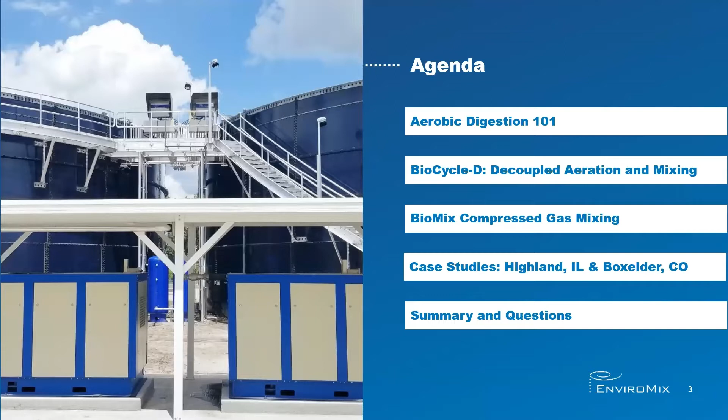So let's get started with conventional aerobic digestion. Did you know that aerobic digestion is typically the second highest, if not the highest, energy consumer in a wastewater treatment plant? During my nearly 20 years of experience in the wastewater industry, I've seen digesters with higher air demands than actual secondary treatment processes.

Which doesn't make any sense from an engineering standpoint. Yet, for years, the problem of aerobic digestion came down to the simple premise of blowing more air at the problem. Aerobic digestion can also have significant impacts on the main treatment process because of side stream return loads to the headworks of the plant.

But before we get to the Enviromix solution, let's start with a more basic question. What is aerobic digestion? The wastewater treatment process takes raw influent wastewater and uses chemistry, physics, and biology to clean the water before returning it to the natural environment.

In the secondary treatment process, microorganisms are used to consume and remove contaminants from the water. The solids treatment is what's done with those microorganisms once they've been removed from the treatment process. Aerobic digestion is a common treatment technology used at small to medium-sized plants for further treatment of waste-activated sludge from the secondary process.

The objectives of aerobic digestion are to prepare the sludge for subsequent use or disposal through the destruction of volatile suspended solids, or VSS, and the reduction of pathogens. In the aerobic digestion process, when no primary sludge is added, there is no food added to the sludge, so the oxygen requirement is for breakdown of the sludge only.

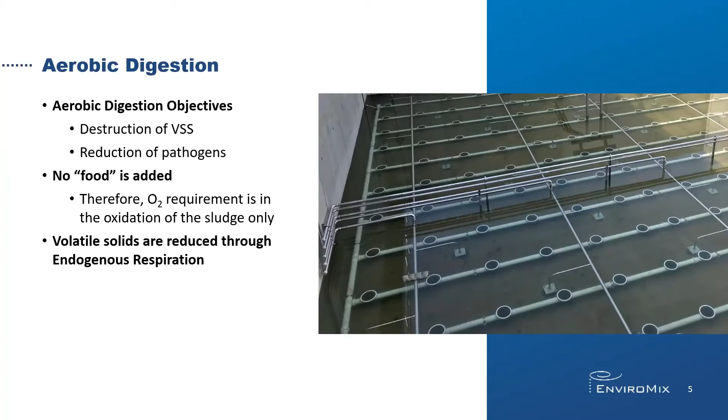Volatile solids are removed through a process called endogenous respiration, where some of the microorganisms die and are consumed by other microorganisms. Endogenous respiration is shown by these highly technical chemical equations.

I don't know about you all, but I don't remember seeing BOD sub bugs anywhere in my edition of Metcalf and Eddy. Regardless, as you can see, oxygen is added to the process and the microorganisms break down into less microorganisms, shown here as less BOD sub bugs, carbon dioxide, water, and ammonia.

As long as there is enough oxygen, the ammonia is then nitrified to nitrite and then nitrate. Notice that the nitrification process consumes alkalinity, which you'll see the importance of in a little bit.

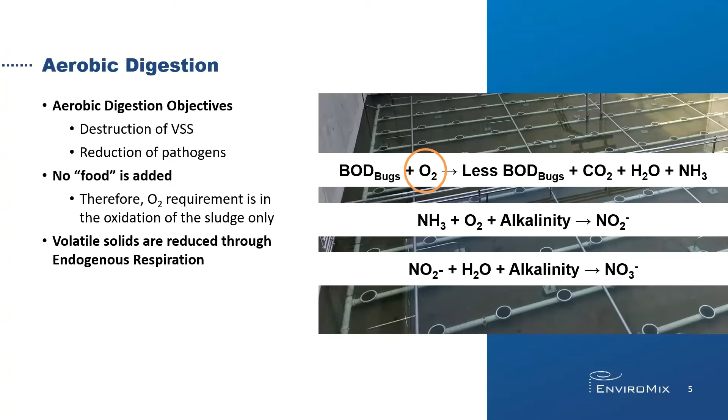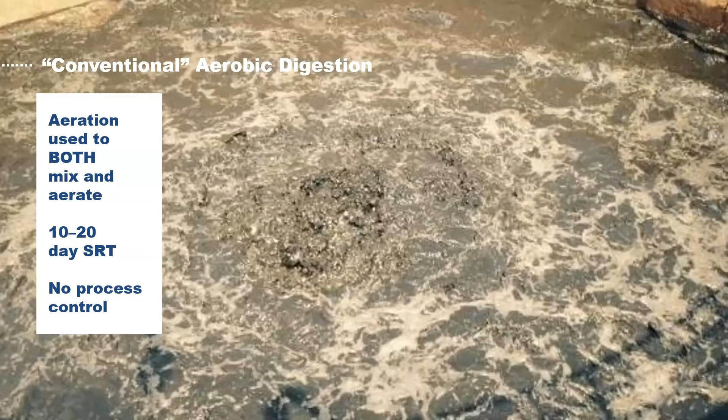In a conventional aerobic digester process, aeration is used to both mix and aerate the tank to provide oxygen needed for the endogenous respiration. The solids retention time, or SRT, is typically about 10 to 20 days. Operators usually manually run the process, and there is little to no automated process control.

For plants that are trying to reduce the financial burden of landfill disposal of biosolids, they need to treat their solids to meet regulations that allow for land application or other surface disposal. This is known as Class B solids. The relevant Class B regulation in the US is 40 CFR 503.

Aerobic digestion can be used to meet Class B solids under this regulation. As I mentioned before, there are two treatment objectives for aerobic digestion: to reduce pathogens and to destroy volatile suspended solids.

The Class B requirement for pathogen destruction is focused on retention time at specific temperatures: 60 days at 15 degrees Celsius, or 40 days at 20 degrees C, or equivalent pathogen reduction. The requirement for volatile solids destruction is at least 38%, or a specific oxygen uptake rate, also known as SOUR, of less than 1.5 milligrams of oxygen per liter. This VSS destruction is in place to reduce odors and prevent the attraction of rodents, flies, or other organisms, known as vector attraction.

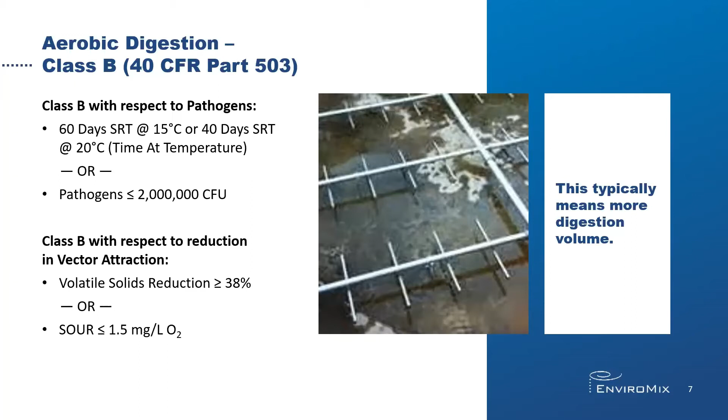Earlier, I mentioned that aerobic digestion is often the highest or second highest energy consumer at the plant. We talk with plants every day and hear about how they are being challenged to make every dollar go further. How can they continue to reduce their operating budget without compromising treatment needs?

Even though aerobic digestion is such a high energy consumer, usually it's put at the bottom of the list or forgotten entirely when looking for ways to meet these financial demands. The mindset of throwing air at the issue can be ingrained in our thinking because we don't think there's any other way to do it.

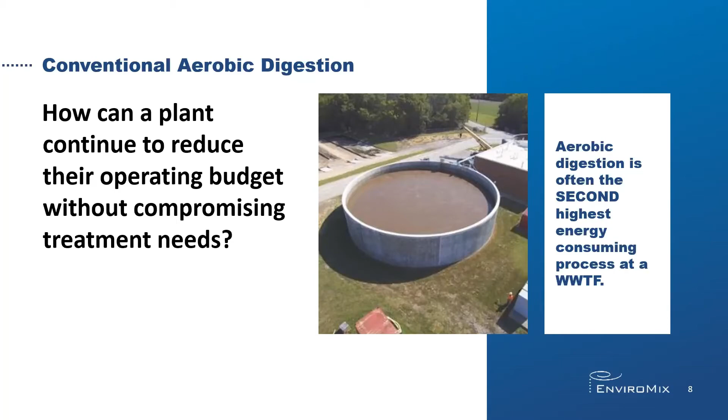So what's the problem with the conventional design? It starts with the aeration system and the difference between what is needed based on the process oxygen requirements and what is needed for mixing.

Sometimes the word mixing limited comes up when designing an aeration system. It isn't as common in aeration basins, although it certainly comes up there as well, but you see it all the time in aerobic digestion. So what does mixing limited mean?

Within a wastewater setting, aeration does two things: it delivers oxygen to the water and it mixes. Aeration is really good at delivering oxygen, and manufacturers have worked hard to maximize oxygen transfer efficiency. The mixing that aeration provides is a side effect of the primary objective of delivering oxygen. That means aeration hasn't been optimized to mix. As a result, once the oxygen demand is met, it can take significant additional energy to completely mix the tank.

In the design of an aeration system for an aerobic digester, two factors are considered when determining the air requirements. The first is the amount of air required to keep the contents of the tank completely mixed. The rule of thumb is between 30 and 40 SCFM per 1,000 cubic feet of tank volume.

The second is the amount of oxygen required for the process, also known as the biological air requirements. Typically, that is around 2.3 pounds of oxygen per pound of volatile suspended solids destroyed. The aeration system needs to be designed for the higher of these two air requirements, which depends on a couple of different factors.

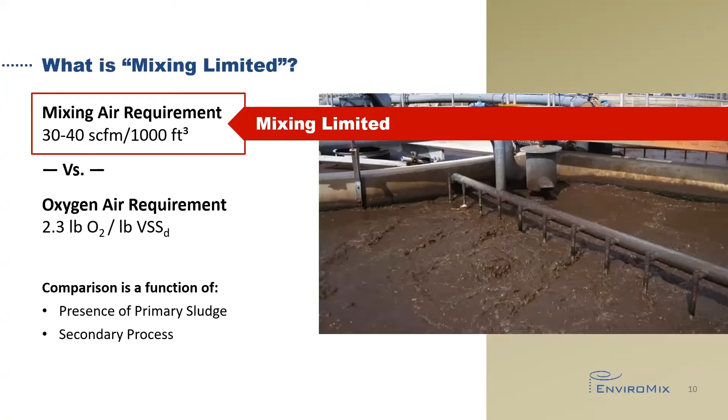That's when we say the process is mixing limited. So what's the problem with the conventional approach to aerobic digestion? Remember, aeration hasn't been optimized for mixing efficiency. The primary concern with the previous approach is the operating budget, and all that excess air being sent to the tanks to ensure adequate mixing really ends up being wasted energy.

Let's say in our previous example that the air required for mixing is 1500 SCFM, and the air required for the process is 1000 SCFM. If the system constantly has to operate at the air requirement for mixing, it's operating at 500 SCFM higher than what's actually needed for the biological process. Essentially, you're using 50% more energy than you need to accomplish the treatment objectives.

Additionally, when we look at the chemical equation for endogenous respiration, remember BOD sub bugs? We saw that ammonia was produced as a byproduct. When that ammonia is nitrified, alkalinity is consumed. Without supplemental addition of alkalinity, the plant can expect a drop in pH. This low pH and excessive aeration can also result in poor sludge dewatering characteristics, which requires higher polymer consumption.

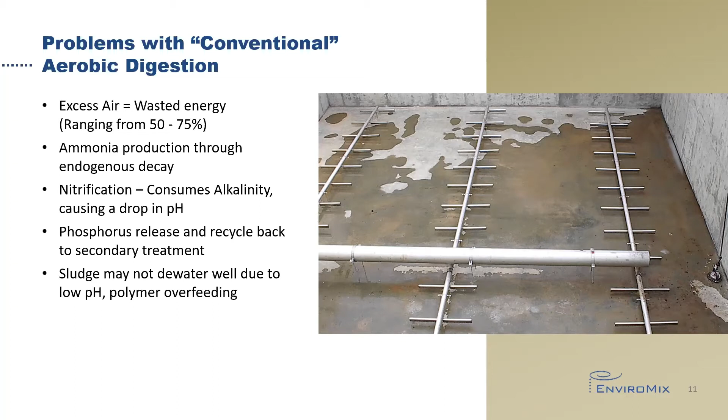Unfortunately, we see many plants that have aerobic digesters that are mixing limited. Why? Well, the number one reason I see is a plant that is operating at a lower capacity than what it was designed for, resulting in lower loading, not only in the secondary process, but in the digesters as well.

Another reason digesters specifically are mixing limited is due to the longer sludge ages in the secondary process. These longer sludge ages help with liquid treatment and lowering effluent nutrients, but result in lower oxygen demands on the solid side, because some of the digestion work gets done in the secondary process.

The other reason that so many plants are mixing limited is the use of higher efficiency diffused aeration over alternative coarse bubble, jet, or other aeration devices. These higher oxygen transfer efficiency diffusers are great, but remember how the aeration system gets designed: it's the maximum of either the air needed for oxygen delivery or the air needed for mixing. And that mixing air rate makes no distinction between aeration device. As a result, all of the energy saved by that great oxygen transfer efficiency is lost because you still need to hit that requirement for mixing.

Finally, we also see aerobic digesters that were converted from different tanks already on site, like an old primary clarifier rededicated to an aerobic digester. Those primary clarifiers can be much larger than what the system design requirements would dictate would be needed, and those systems are routinely mixing limited as well.

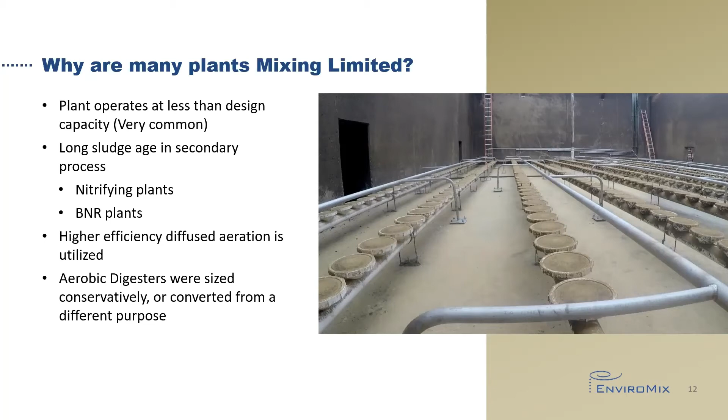Next, I'd like to discuss Enviromix's optimized aerobic digester design approach, which includes mixing that is independent from the aeration equipment.

BioCycle D works by alternating between aerobic and anoxic conditions to provide an ideal environment for sludge digestion. The process also offers two alternative modes of operation, selected based on a plant's individual setup. For plants that utilize a belt press or centrifuge for dewatering, there is a sludge processing mode of operation. For plants utilizing gravity thickening with an automated decanter, the supernatant return mode allows for this type of operation. We will go into each of these in greater detail.

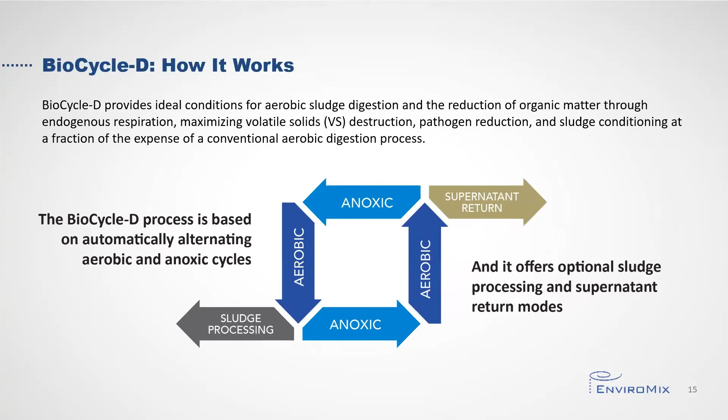During the aerobic cycle, air is provided to the system to facilitate VS destruction. For plants with conical or sloped bottom tanks, or when the air demand is lower than that of the mixing demand, the mixing system will operate at the same time as the aeration system. That ensures the tank remains mixed and that the aeration is able to deliver just the right amount of air without over-aerating the process. During the anoxic cycle, the BioMix compressed gas mixing system ensures complete mixing to create anoxic conditions for denitrification, alkalinity recovery, and pH stability.

Cycling between the aerobic and anoxic conditions causes cell walls to rupture, which allows for increased VS destruction and improved sludge dewaterability. That reduces polymer demand and operating costs.

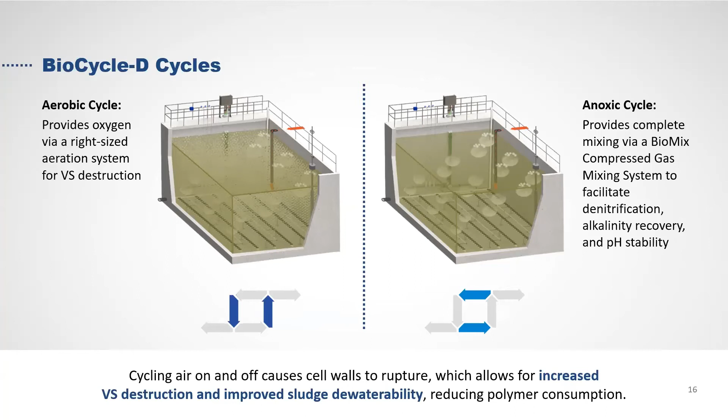As I mentioned earlier, there are two optional modes of operation designed to sequester the nutrients in the sludge and eliminate nutrient spikes in the return streams to the secondary process. The sludge processing mode is utilized when sludge is being removed from the tank for further processing.

When we were developing BioCycle D, we heard from dewatering equipment vendors who told us that the most important thing for their equipment is consistent flow and consistent solids concentration. Sludge processing mode does just that. This mode uses the mixing equipment to ensure the sludge is homogeneous, which helps regulate and stabilize the polymer addition.

During this mode of operation, the ORP readings in the tank are monitored to ensure the process doesn't go anaerobic and allow for P release. If ORP drops below a set point, the aeration is turned on to provide oxygen to the process.

Supernatant return mode is used specifically for plants that have an automated decanting device, whether that be with a floating decanter or an automated telescoping valve. Gravity thickening can help increase capacity by thickening the sludge and removing excess water.

The supernatant return mode can automatically initiate a decant after a user selectable settling time. The decant cycle ends depending on one of three factors: time of decant, liquid level, or weir position. After decant is complete, the system resumes an aerobic cycle. By sequestering the nutrients in the sludge and reducing the loading to the main treatment process during supernatant return, BioCycle D reduces operating costs for the main treatment process while optimizing sludge digestion.

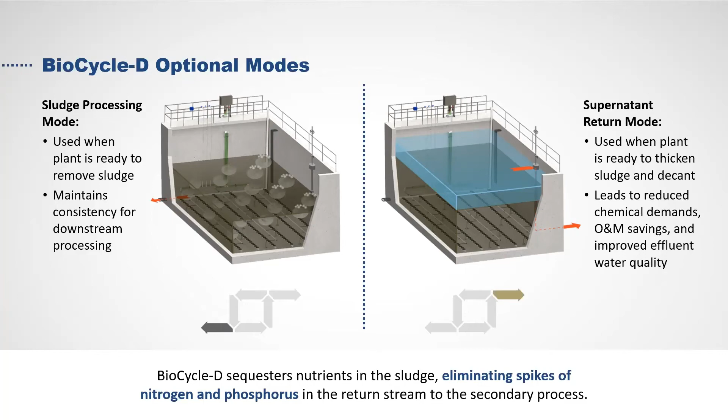The key to BioCycle D and its ability to optimize aerobic sludge digestion is the decoupling of aeration from mixing. The diffused aeration system is right-sized to satisfy only the process oxygen demand. The basin contents are uniformly mixed by the compressed gas mixing system, independent of the aeration system operation.

This opens up a bunch of possibilities that weren't possible with traditional aerobic digestion operation. On the energy side, it eliminates the need to sustain the traditional 30 to 40 SCFM per 1,000 cubic feet design guideline. On the process side, by maintaining the optimal DO needed for the digestion process, BioCycle D is able to recover alkalinity and control pH, reduce plant power bills through oxygen recovery, and reduce nutrient recycle back to the secondary treatment process. The denitrification process can also reduce the proliferation of filamentous bacteria, thereby improving settling, sludge thickening, and overall operational efficiency.

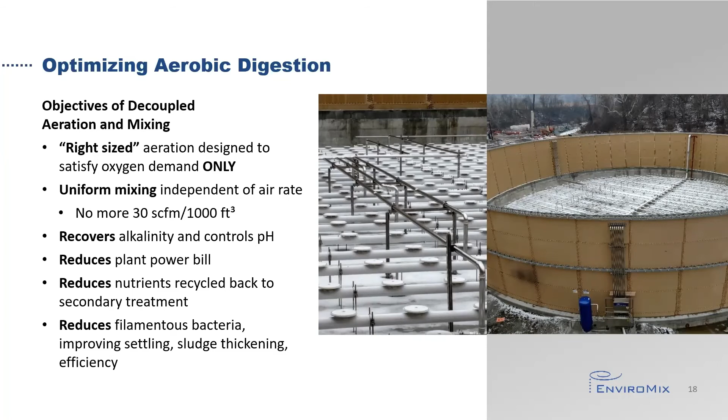By regulating the aerobic phase of the process through DO instrumentation feedback, optimized air delivery and effective digestion are achieved. During the aerobic phase, the blowers operate to achieve the DO set point. We typically recommend that the blowers be on VFDs, which allows for the requested DO concentration to be precisely maintained. However, we can also work with existing infrastructure where there may be blowers without VFDs.

That is what we are showing with this data. The blowers at this plant are start-stop controlled.

Controlling the anoxic phase of the process through ORP monitoring and efficient mixing via the BioMix compressed gas mixing system enables denitrification and alkalinity recovery while reducing nutrient return in the digester supernatant. During the anoxic phase, the blowers shut off and only the mixing system operates to achieve the low ORP set point for denitrification. Once the low ORP set point is met, the aerobic phase begins again and the cycle repeats.

The aerobic and anoxic phase cycling minimizes nutrients in the supernatant return, and the process benefits of optimized digestion result in improved sludge dewaterability.

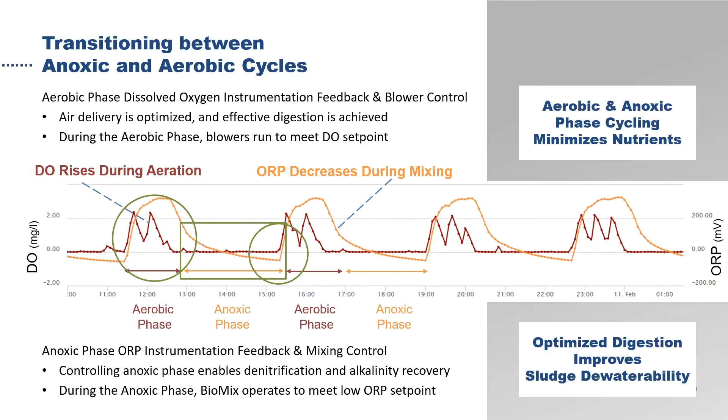BioCycle D operates with repeating aerobic and anoxic cycles. Aerobic cycles are facilitated by the right-sized fine or coarse bubble diffused aeration, and the anoxic mix cycles are facilitated by the compressed gas mixing system.

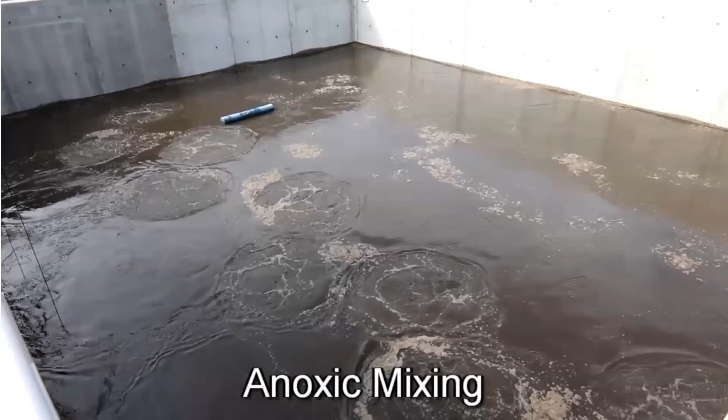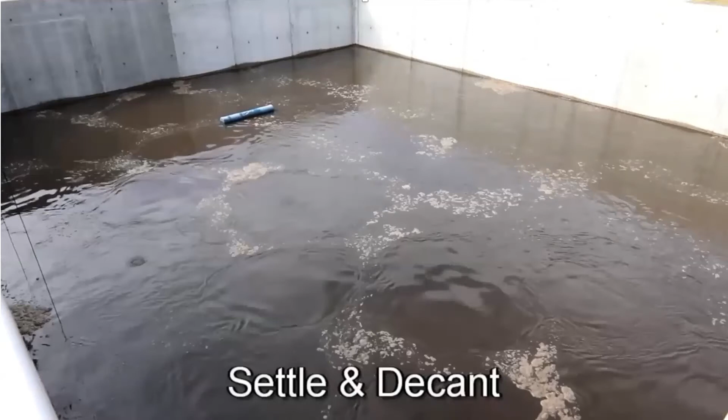The anoxic cycle is followed by an operator selectable settling and decant phase of the operation to thicken the sludge and return supernatant if desired.

Decoupling aeration from mixing allows for independent and optimized control of oxygen transfer and mixing, whereby fine or coarse bubble diffused aeration is provided for oxygen transfer, and the BioMix compressed gas mixing system provides efficient mixing. The aeration system is right-sized, and therefore the aeration system operates only for the process oxygen demand, not for mixing.

The compressed gas mixing system may operate during the aerobic periods when the air rate is lower than that needed to sufficiently mix the basins. And of course, the compressed gas mixing system will operate during the anoxic phases.

BioCycle D is typically designed with 12 to 16 hours of aerobic time per day and 8 to 12 hours of anoxic time per day. It is typical that the BioCycle D aerobic digestion process will operate with less aerobic time and more anoxic time at startup, when the plant is typically at less than design loading, thereby providing further energy savings.

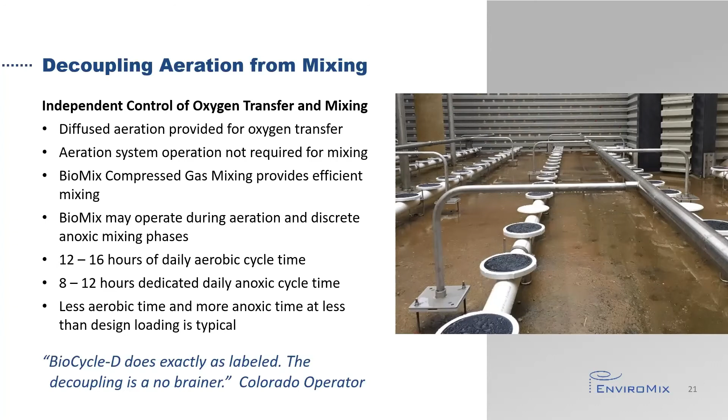One feature of the BioCycle D system that plays a large role in providing optimized aerobic digestion and unparalleled flexibility is the compressed gas mixing system we call BioMix.

The BioMix compressed gas mixing system utilizes a rotary screw compressor to supply compressed air based on the system's demand for mixing. The compressor discharges to the receiver tank, which buffers air demand and maintains system pressure.

From there, the air goes to the local valve control modules that control the parameters of frequency of firing for each header in the basin, the duration of air release, and the sequence of nozzle header firing. Finally, the air is released from the in-tank stainless steel maintenance-free nozzles.

Enviromix provides all the major mechanical components for the system, complete with unit responsibility, and guarantees mixing effectiveness backed up by a field performance test.

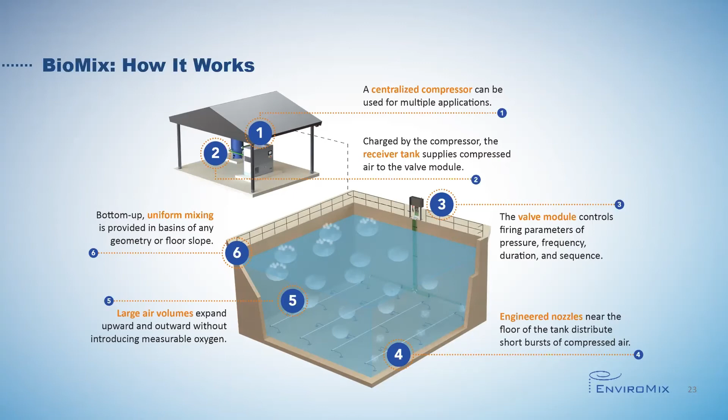BioMix operates by introducing short duration, half to one second bursts of compressed air fired through the nozzle header system. This creates a distributed bottom-up rolling mixing action. Groups of nozzles arrayed on an individual nozzle header are fired 2 to 3 times per minute to ensure uniformly mixed basin contents.

You can see in the video here the changing of the cycles between aerobic, anoxic, and settle and decant.

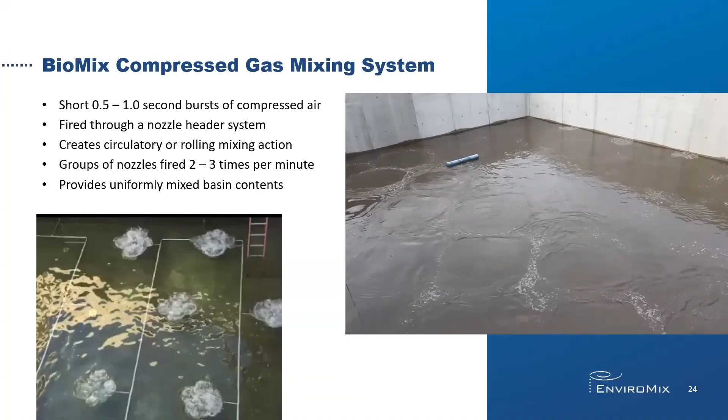With traditional mixing technology, maintenance is the key challenge. The main issues being hair and ragging of impellers, mechanical seal failure, gearbox maintenance, in-basin oil changes, and general longevity and reliability. Energy consumption is typically about double in comparison to BioMix in an aerobic digestion application.

Furthermore, redundancy can be a concern with traditional mixers. When a mixer is out of service, the process efficiency will suffer. Whereas with BioMix, a duty standby arrangement can provide 100% redundancy.

Finally, mechanical mixing technology is operationally inflexible because it doesn't allow aeration and mixing to be operated at the same time. However, because BioMix can pick up the mixing requirement, the aeration can be adjusted to match only what is needed to meet the process oxygen demand.

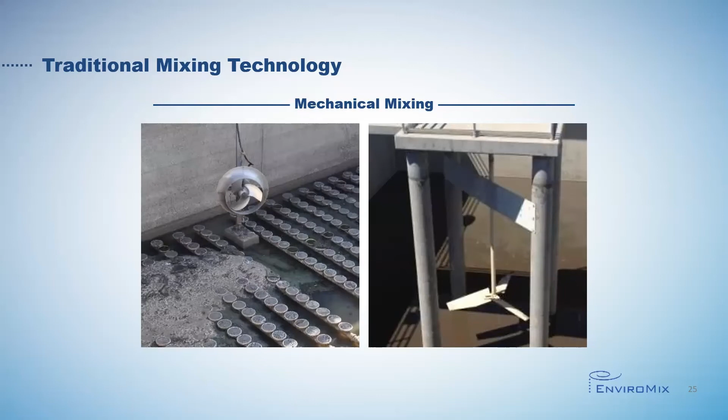Combining compressed gas mixing and fine bubble aeration is at the core of what makes BioCycle D so unique. First are the energy savings. BioMix uses 40 to 60% less energy than traditional mechanical mixing.

Second, BioMix requires no in-basin maintenance. Third, and most critically for the digestion process, it allows for simultaneous mixing with aeration at lower aeration rates. And finally, BioMix does not impart significant forces on the aeration grid, unlike point source mechanical mixing, thereby eliminating required reinforcement of the aeration system, the need for clear zones around the mixer, and the potential for damage.

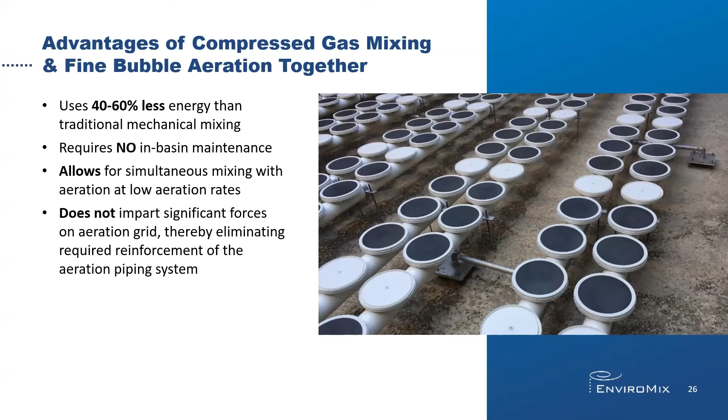BioMix compressed gas mixing also does things that no other mixing system can do. It can mix below the aeration grid, thereby eliminating dead zones, sludge deposition, and the potential for septic sludge.

In conical bottom or sloped floor basins, a diffused aeration system needs to be mounted with a common submergence to ensure proper air distribution. However, because BioMix only fires one header at a time, it is able to mix down into the cone where aeration and mixers can't get. This allows the process to utilize volume that otherwise would have been taken up by settled sludge, and that maximizes basin retention time.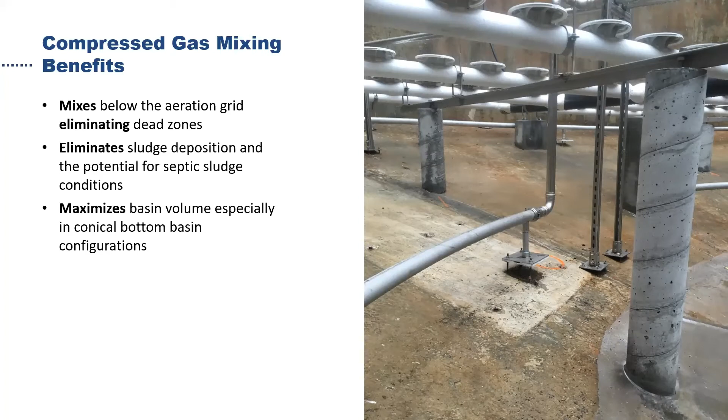We're going to look at a case study on a plant in Highland, Illinois that implemented BioCycle D and see what their experience was.

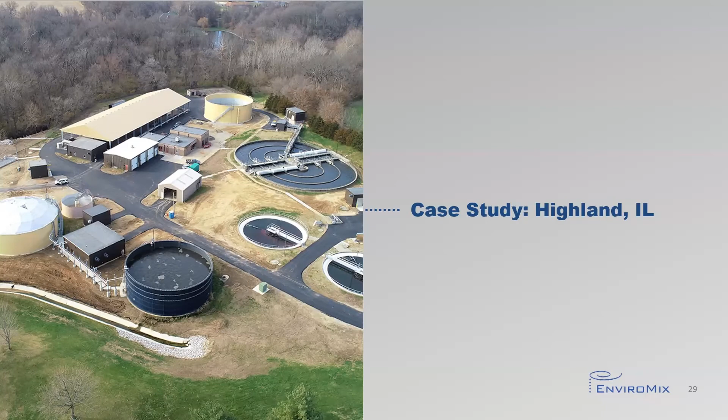In 2020, the city of Highland selected BioCycle D as part of their wastewater treatment plant upgrade. The project included new headworks, secondary clarification, aerobic digestion, sludge holding, and sludge dewatering. The previous system consisted of inefficient coarse bubble aeration and airlift pumps to transfer sludge between cells in the aerobic digester. Meanwhile, the sludge holding tank had a pumped mix system. The new BioMix equipment included two 25 horsepower rotary screw compressors and three 60 horsepower positive displacement blowers.

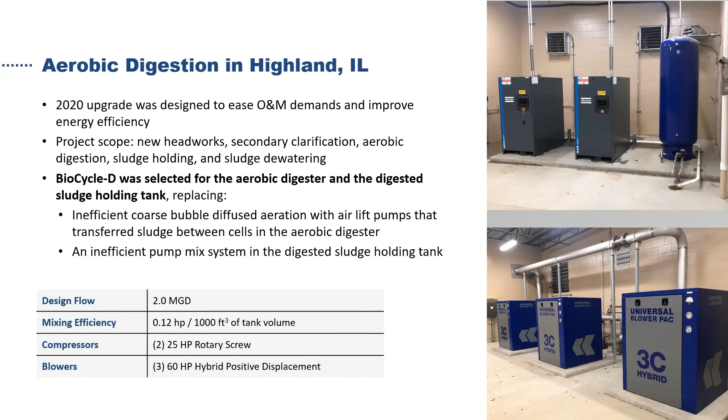One of the things that Bill Zimmer, the Highland plant supervisor, especially liked with the BioCycle D system is the simplicity and automation. He was, by his own admission, apprehensive about turning over the keys of the process to a technological black box, but he has been surprised at the lack of issues he's had. The system automatically adjusts the tank's operation based on the loading conditions.

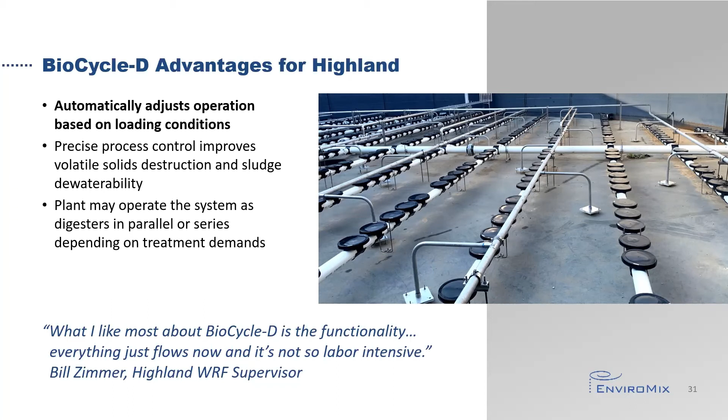They have also seen improvements in sludge dewaterability and VS destruction. Additionally, the plant was given the possibility to operate the basins in series or in parallel. They currently choose to operate them in series, but he appreciates the flexibility to also operate in parallel.

Using the conventional design approach of aerated mixing using diffused aeration, 30 SCFM per 1,000 cubic feet of tank volume would have been required. The conventional approach would have required three 200 horsepower duty blowers, one for each tank, plus a standby, with two of them running continuously to aerate and mix the digesters.

The aeration system for BioCycle D is designed to deliver the required biological oxygen demand with 16 hours of aeration per day, served by a 60 horsepower blower for each digester, plus one spare. In addition, a single 25 horsepower compressor was provided to mix both digesters independently or simultaneously, with a second compressor for 100% redundancy.

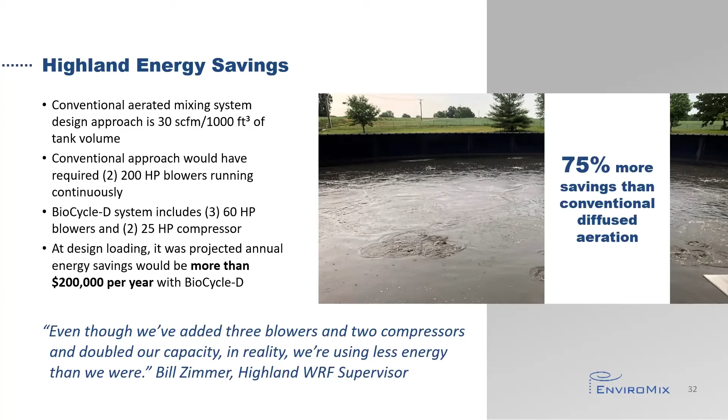Actual energy savings seen are nearly 75% over the conventional design approach. Bill was surprised that even though they were treating more flow, they are using less energy than they were with their old system. We're going to look at an example from Boxelder, Colorado.

The Boxelder Sanitation District provides service to customers in and around Fort Collins. The district upgraded from a lagoon system to a state-of-the-art wastewater treatment facility in 2013, with an upgrade in 2020 that was focused around both population growth and more stringent effluent limits for nutrients. The plant is currently designed for a 4.6 MGD max month flow with effluent total phosphorus of 0.7 milligrams per liter and effluent inorganic nitrogen of 7 milligrams per liter.

Enviromix's BioCycle D was selected as the technology of choice after comparison to a conventional aerobic digester similar to Highland. The solution included two 50 horsepower compressors for mixing energy and three 150 horsepower PD blowers for the aeration. By decoupling the mixing and aeration, the mixing efficiency for the process is about 0.2 horsepower per 1,000 cubic feet.

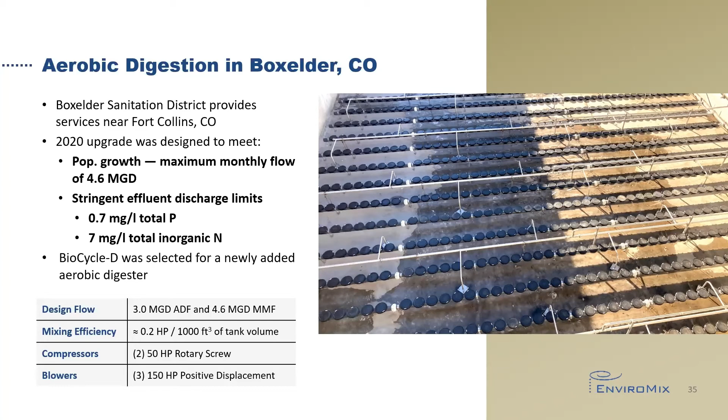On the energy side, the facility was able to recognize savings of more than $175,000 annually when compared to a conventional aerobic digester that would have required three 250 horsepower blowers for operation, thus driving BioCycle D to be the solution of choice with the lowest total cost of ownership.

The plant was also able to eliminate the $400,000 line item on their operating budget by eliminating the need to dredge the former sludge storage lagoon annually. The Boxelder plant manager, Craig Hibbard, was pleased with the minimal localized maintenance offered with BioCycle D, as the only in-tank maintenance is for the diffused aeration system.

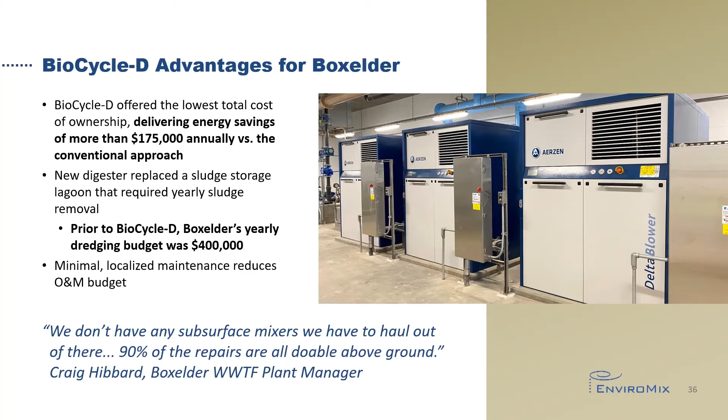Along with energy and maintenance savings, the plant has also been impressed with the reduction in nitrogen sent back to the secondary treatment process. The digesters have a decanter so they can gravity thicken right in the digester. That stream is returned to the influent. The pressate from the screw press is also returned to the head of the plant.

With the lagoon, the plant often saw high spikes of nitrogen when they decanted. With Biocycle D and the transition between aerobic and anoxic conditions, the ammonia that is released from the heterotrophs can be nitrified and subsequently denitrified. This results in lower levels of both ammonia and nitrate in the return streams.

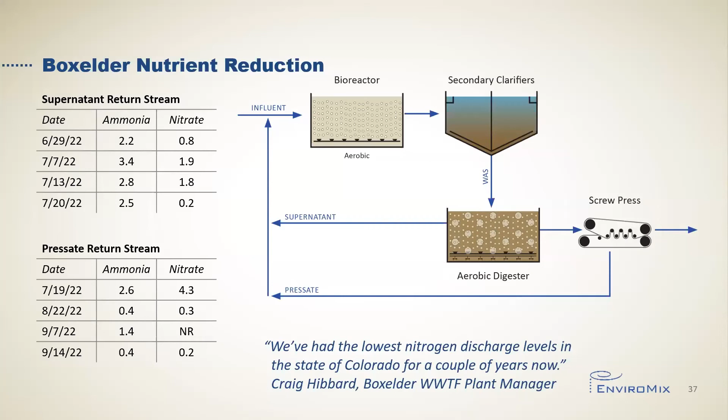So that concludes our analysis of 2 Biocycle D installations and how they have solved some of the biggest issues that plague aerobic digestion, namely energy usage and process stability. Now, there was one more thing I wanted to mention. As I was preparing my presentation today, I was reading through the background on Highland, Illinois, and there was one more comment that I felt was important to include.

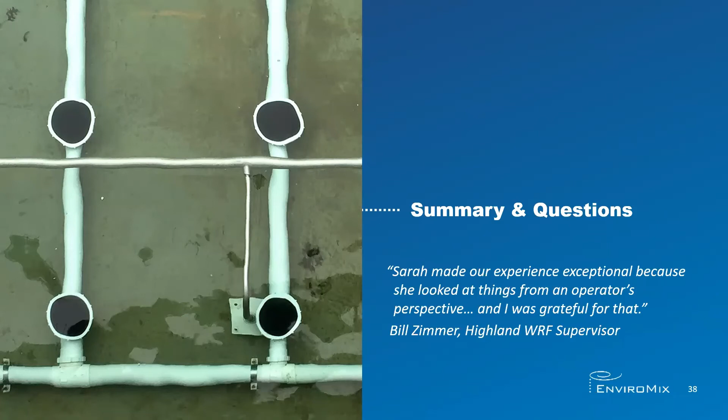She would never say this about herself, but my co-presenter today, Sarah, is awesome. And Bill from Highland discussed just that with a comment he made about how Sarah went above and beyond to help during startup and operation. Biocycle D is a great process, but it's the people at Enviromix that make all the difference.

So to summarize the benefits of the Biocycle D aerobic digester, we first focused on the terrific energy savings, typically around 50 to 75% compared to conventional designs. The energy savings come from the separation of aeration and mixing equipment, which allows the system to deliver only the air that is needed. Biocycle D also encourages nitrification and denitrification by creating an operating cycle that adjusts automatically based on the system's demand. Finally, the integrated solution ensures that the plant is fully supported for years to come.

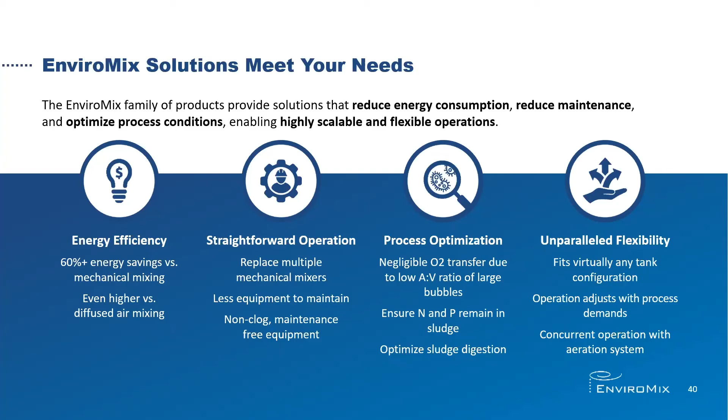Thanks, Scott. We do have a couple of questions already flowing in. I'll send a few your way. The first one, if you wouldn't mind answering, is how are the cycle times controlled? Is it based on time or just input from the instrumentation?

During the anoxic period, we monitor the ORP, and when it reaches a minimum value, then we know that all the nitrates have been denitrified. And in order to avoid going anaerobic, that's where we'll switch back into an aerobic period. An anaerobic period is where you might get phosphorus release from the sludge, and we don't want that to happen. So we use a minimum set point for the ORP, in order to transition back to the aerobic cycle.